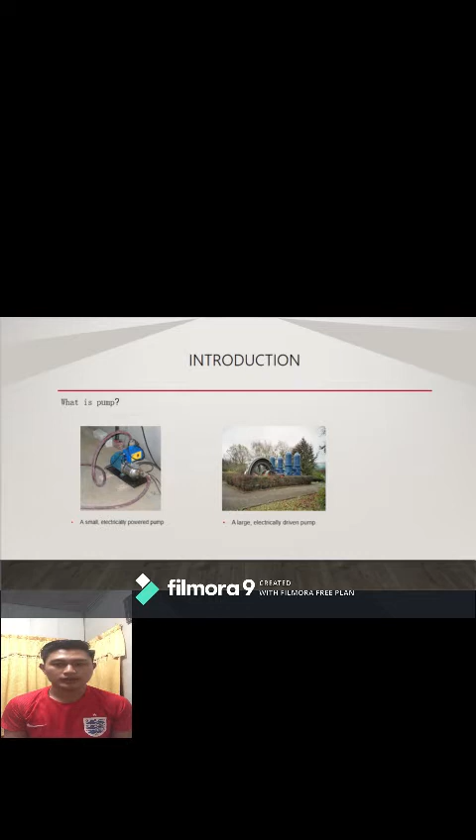Pumps operate by some mechanism, typically reciprocating or rotary, and consume energy to perform mechanical work moving the fluid. Pumps operate via many energy sources, including manual operation, electricity, engines, or wind power, and come in many sizes, from microscopic for use in medical applications to large industrial pumps.

A centrifugal water pump uses a rotating impeller to move water into the pump and pressurize the discharge flow. Centrifugal water pumps come in several different types, including standard, trash, and submersible models. All liquids can be pumped using centrifugal water pumps, even those with low viscosity. These pumps work well with thin liquids and offer high flow rates.

Centrifugal pumps are used in many construction and water system applications. In addition to dewatering, they are employed to pump water supplies in buildings and are compatible with pneumatic systems and where no suction lift is required. They are also used to pump water from domestic wells and to boost pressure in water intake lines.

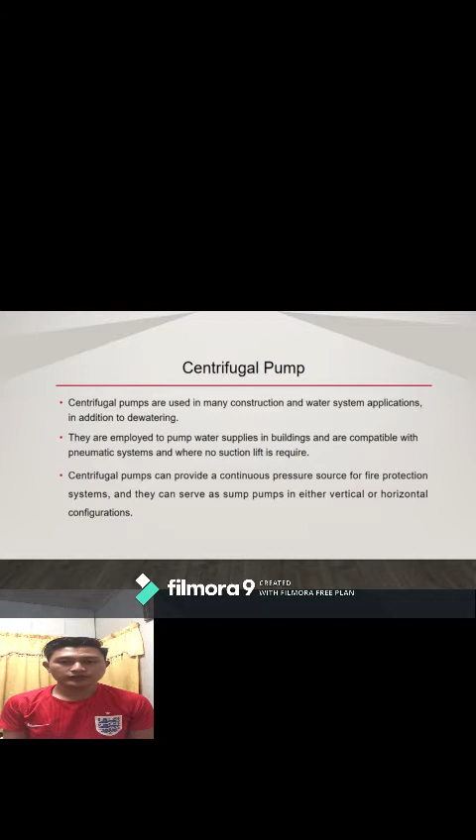Centrifugal pumps can provide a continuous pressure source for fire protection systems, and they can serve as sump pumps in either vertical or horizontal configuration. These are the parts of a centrifugal pump. You can see the image.

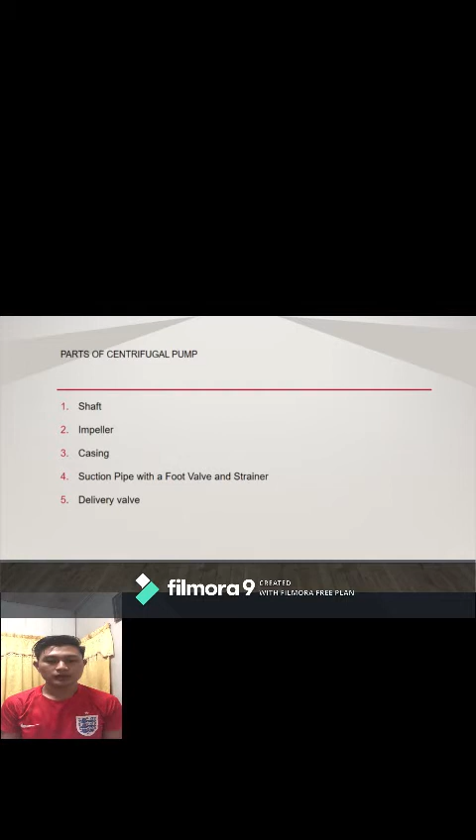The different parts of a centrifugal pump are: first, the shaft. It is a central rotating part of the pump to which the impeller is connected. The shaft is coupled to the prime mover to get the power. Second, the impeller. It consists of a series of backward curved vanes. It is mounted to the shaft of an electrical motor. An impeller is a rotating part of the centrifugal pump. It is enclosed in a watertight casing.

Third, the casing. It is an airtight passage surrounding the impeller. It is designed in such a way that the kinetic energy of the water discharged at the outlet is converted into pressure energy before the water leaves the casing and enters the delivery pipes.

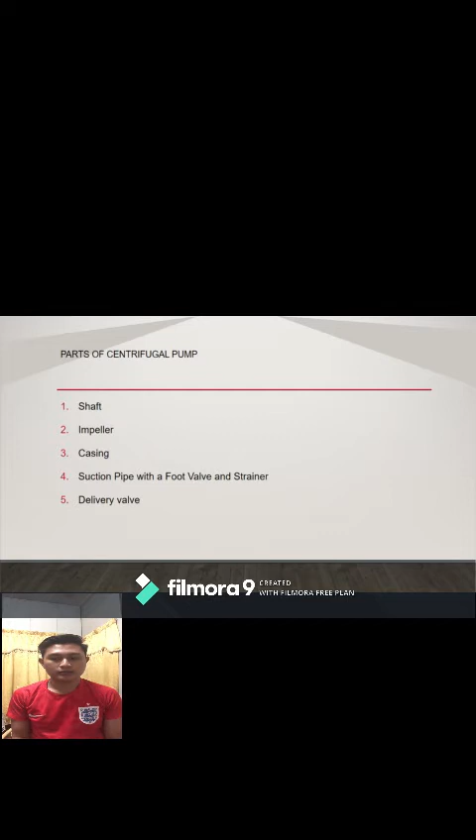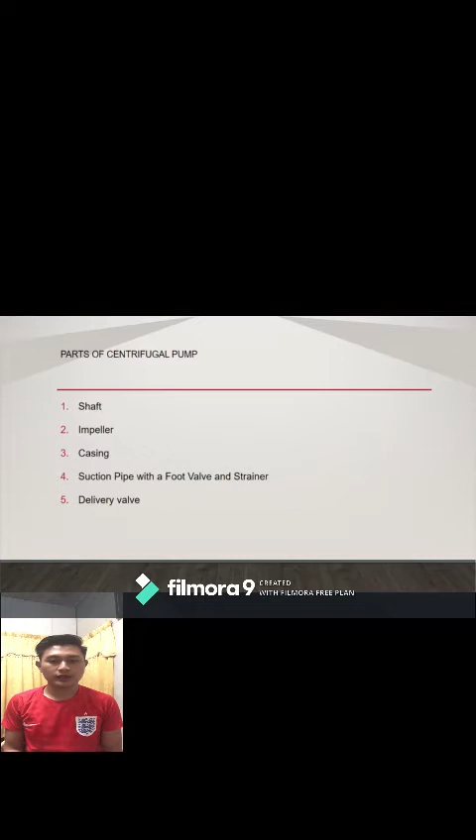Fourth, the suction pipe with a foot valve and strainer. The suction pipe has two ends. One end is connected to the inlet of the pump and the other dips into water in a sump. And lastly, the delivery valve. The delivery valve has two ends. One end is connected to the outlet of the pump and the other end delivers the water at the required height.

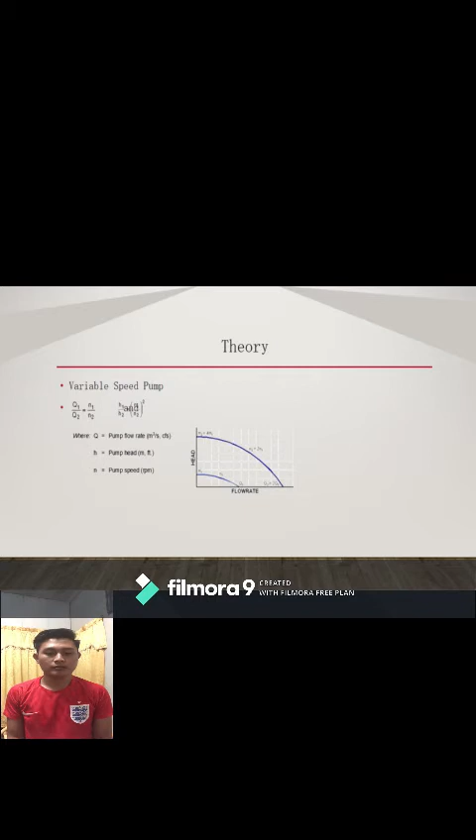For theory, variable speed pumps. A pump's characteristic curve is fixed for a given motor speed and impeller diameter, but can be determined for any speed and any diameter by applying the affinity laws. For variable speed pumps, these affinity laws are presented as Q1/Q2 = N1/N2 and H1/H2 = (N1/N2)², where Q is the pump flow rate, H the pump head, and N the pump speed.

Close-coupled pumps are characterized by a common motor and pump shaft, or by their motor shaft and pump shaft being rigidly connected in the pump casing. The pump casing is bolted to the drive flange rather than being installed on a pump foot. This enables straightforward installation as the shaft and casing do not need to be aligned.

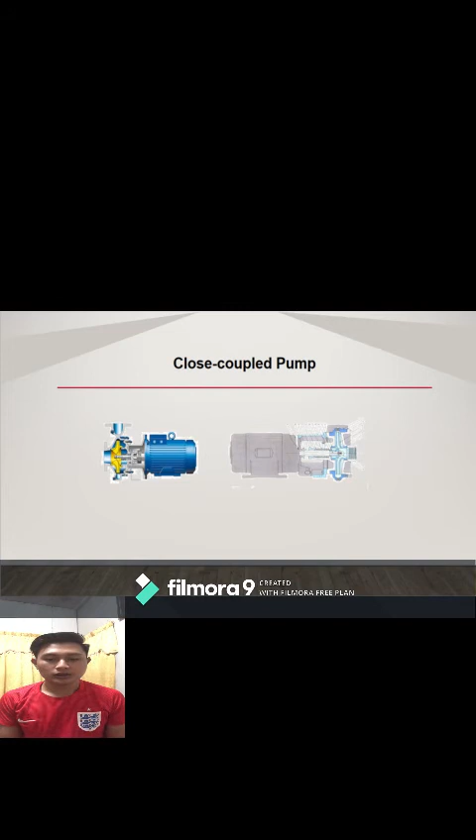It is a type of pump that involves an impeller as the central element of the motor component. The pump doesn't have a separate coupling and thus eliminates coupling alignment, one of the more expensive and time-consuming operations of pumps that aren't close-coupled.

Okay, how do they work in usage? In a close-coupled pump, the impeller is on the same shaft as the electric motor that drives the pump. The motor has a machined face on one end, which matches the face on the pump casing that is mounted against the motor face. The bearings in the motor must handle the force generated by the pump, since it doesn't have its own separate bearing housing.

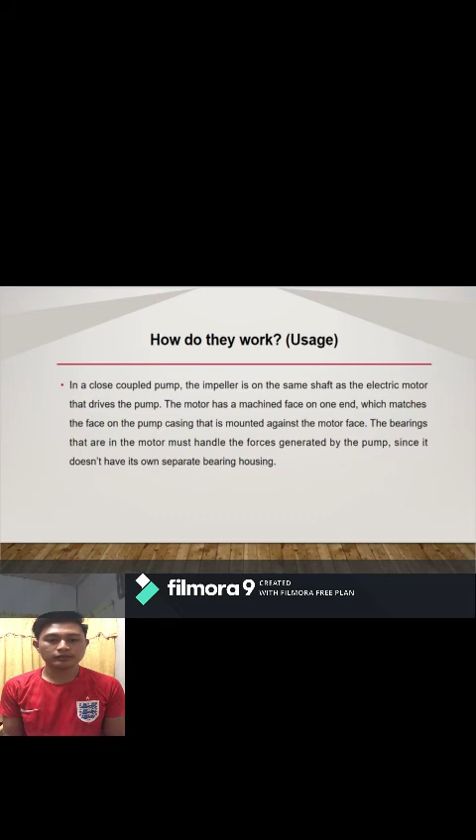The simplicity, versatility, and relatively low cost of this type of pump make them useful in many industries. They typically are used with relatively simple seals, so they are limited as to temperature and to relatively non-corrosive liquids. Because the bearings are located in the motor, close-coupled pumps are limited in size to about 40 to 50 HP for most applications.